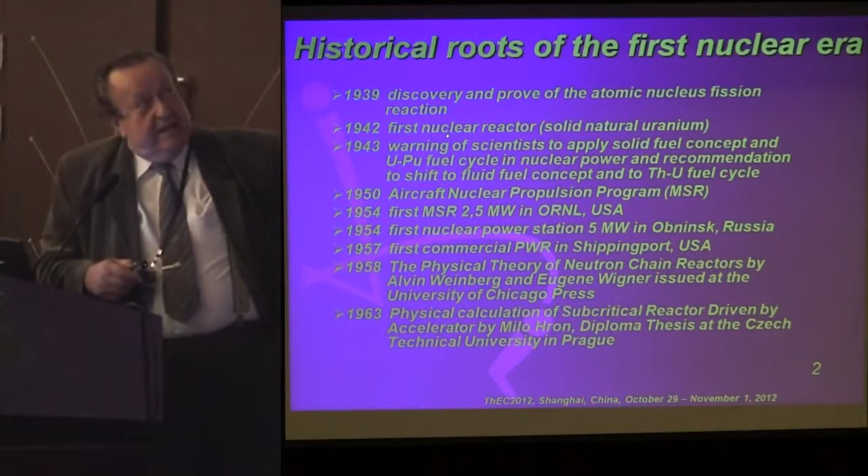The most important, I suppose, is the very beginning of this nuclear power application, which started - we are very close to the 70th anniversary of the startup of the first nuclear reactor, beginning of December 1942. And at that time we know very well there was only one possibility, the only fuel available, natural uranium.

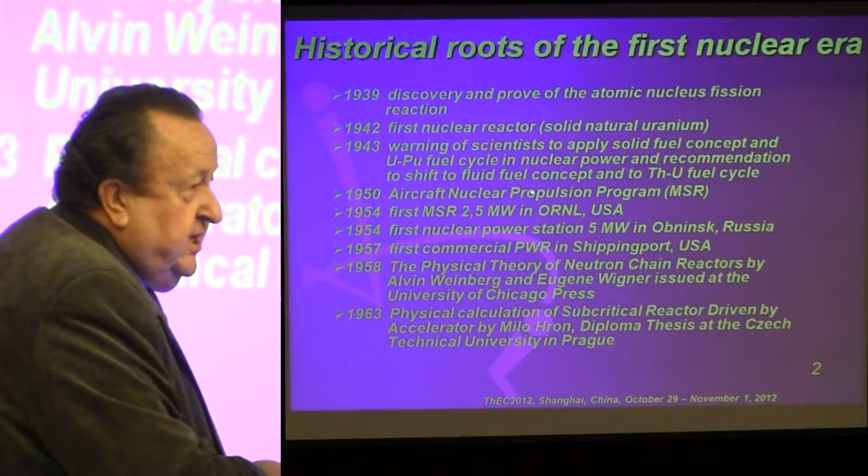To reach criticality, to put into operation and to keep the chain fission reaction, it was necessary to realize this first nuclear reactor system with the fuel in a solid phase, to have the highest density of nuclei, and to arrange it in the optimal heterogeneous reactor structure, with the optimal grid and highest quality moderator.

But the concept of solid fuel was, from the very beginning, the worst handicap of these nuclear reactor systems in the first era.

What's more, the top brains from the team of Professor Enrico Fermi, who organized this first step entering the first nuclear era, at a scientific conference in spring 1943 - of course at the time a secret conference - nevertheless immediately expressed a warning.

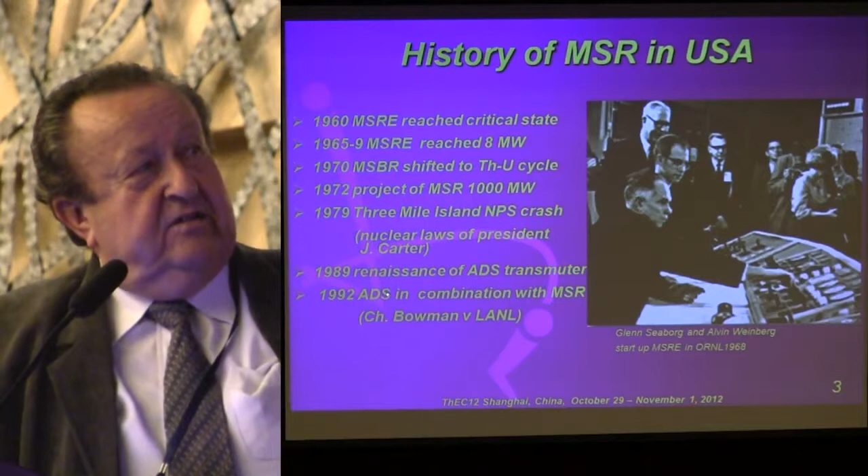It seems to me very important that the first accident in the United States, Three Mile Island, led to a stop in the further development of these new concepts and systems, and the renaissance of these efforts started at the beginning of the 90s.

So when it was stopped in the United States, fortunately other countries started to go on with this. Especially I should mention the activity of Professor Furukawa in Japan, who also initiated activity in this field in Russia, and I was personally participating in the collaboration where the Russian program was collaborating with some Czech institutions, solving especially...

...the problem of the fluoride volatility process and this technology. You see here the pilot line which was developed and manufactured in the Czech, at the time Czechoslovak, research and industrial basis, and installed in the first half of the 80s at the Russian Research Institute of Atomic Reactors in Dimitrovgrad, where it was available for checking this technology at a relatively high level of capacity.

The capacity of this line was reprocessing of 2 kilograms of heavy metal per hour. It was the heavy metal from the hot spent fuel from fast reactor. Immediately or a few days after discharging from the fast reactor, it was possible to reprocess.

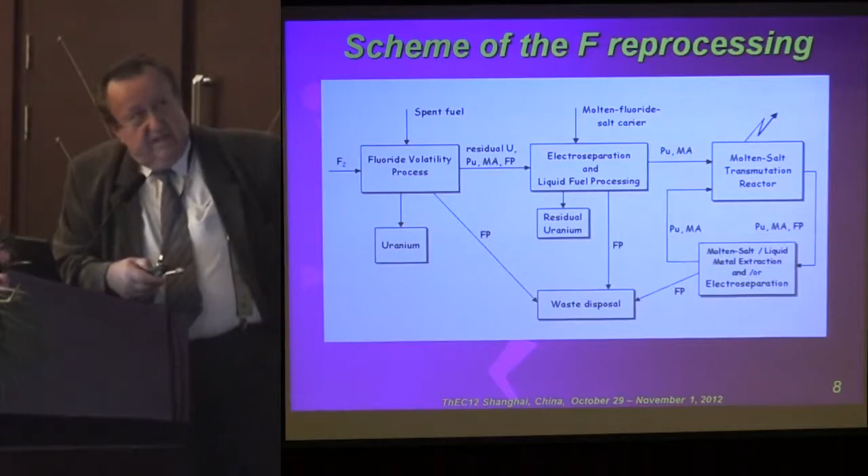You see on the scheme of this technology that this is very efficient. Separation by this technology is giving you 95% of spent fuel from a conventional reactor, for example from a pressurized water reactor. Totally, the whole amount of uranium and the short-lived fission products are going out of the cycle, and the rest - all the actinides and long-lived fission products, totally 5% of the whole amount of this spent fuel - you are obtaining in the form of fluorides, which may be molten, giving you your liquid fuel for this molten salt reactor system.

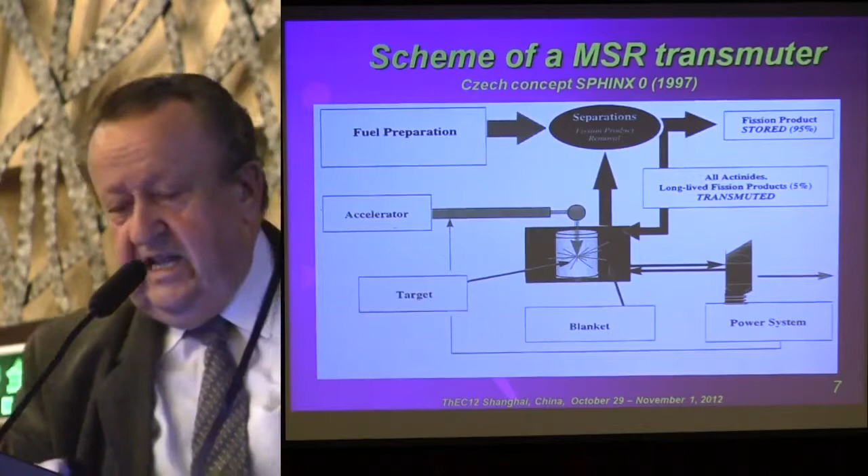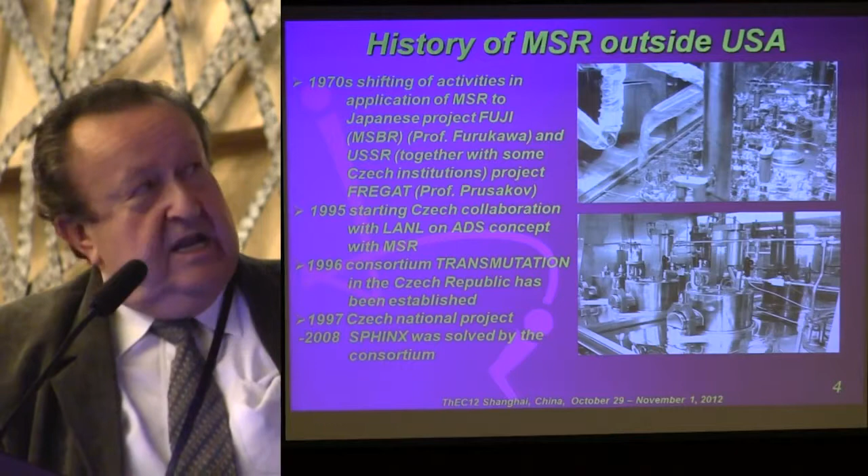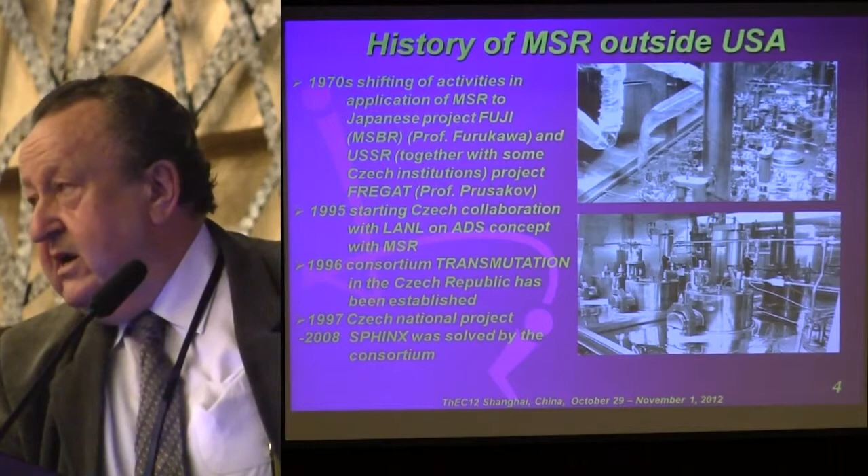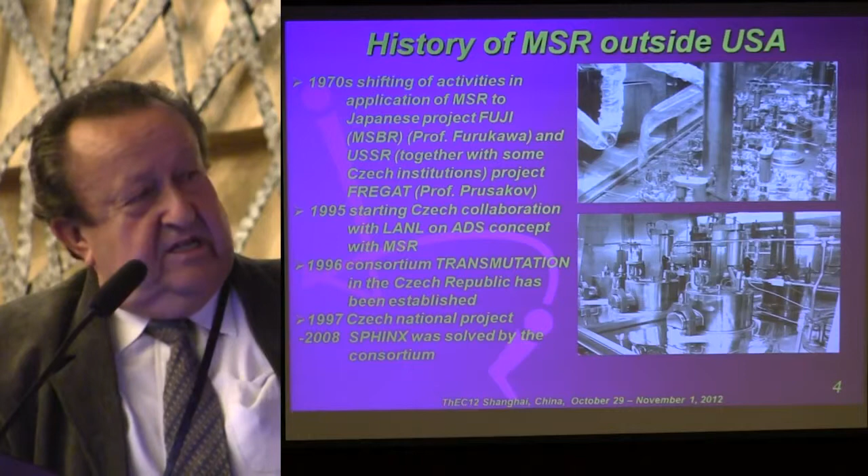Backwards to this renaissance in the beginning of the 90s. In '95 I was personally on a short study stay in Los Alamos National Laboratory, and afterwards started the collaboration between the Czech - at that time already Czech Republic was established - research and industrial institutions. They formed in 1996 a National Consortium, and started our national project Sphinx, which you see here.

The consortium was led by the Nuclear Research Institute, and the members were the industrial company Škoda Nuclear Machinery Branch, the Nuclear Physics Institute of the Czech Academy of Sciences, and the universities. From the very beginning it was the Czech Technical University in Prague, especially its Faculty of Nuclear Science and Engineering.

In the year 2000, Technical University in Brno joined this consortium, especially its daughter company EVM. And just recently, in 2010, the University of West Bohemia in Pilsen joined, which is preparing and educating specialists especially for Škoda Nuclear Machinery and the operation of nuclear power plants in our country.

The project we started, in fact after the establishment of this consortium in 1997, is called by the abbreviation Sphinx. You have here the meaning of this: Spent Hot fuel INcinerator by neutron flux, as I described, utilizing this fluoride volatility process for the front end of the fuel cycle. It is possible to use it for the nuclear incineration of spent fuel from conventional reactors.

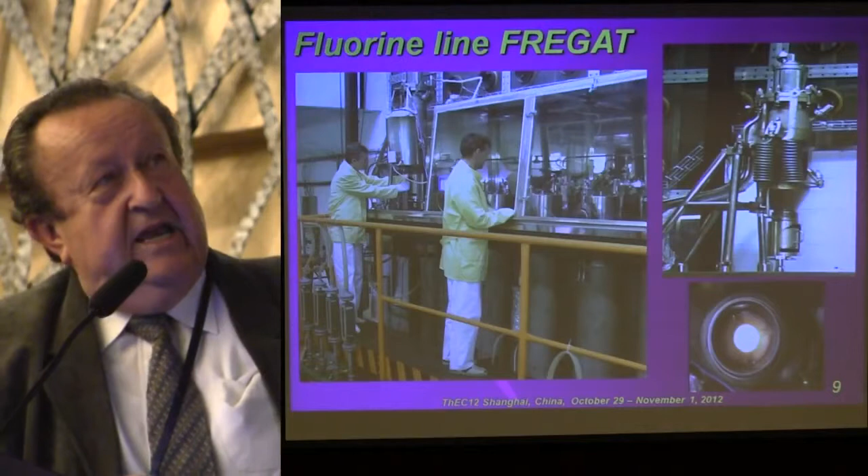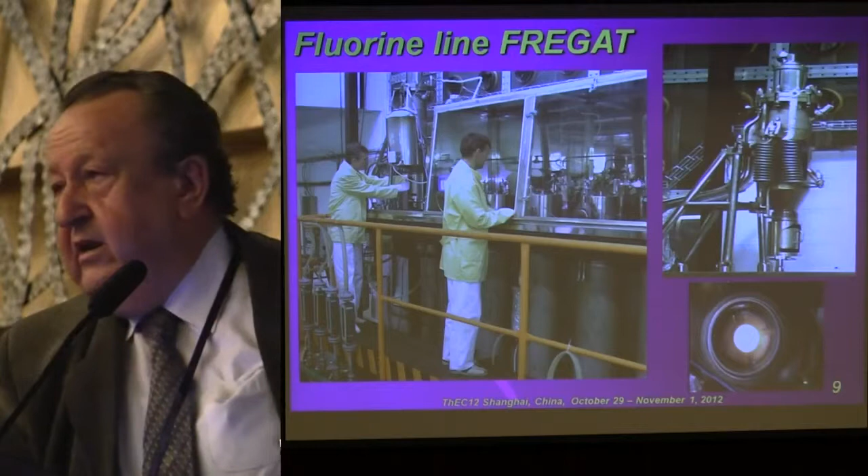You see here the scheme I've already shown, the detailed scheme of this fluoride reprocessing, and the pilot line, which was originally, as I mentioned, in Dimitrovgrad. But after the Chernobyl accident in 1986, the Russian activities in this field were stopped or temporarily interrupted. But in the year 1998-99, we moved this pilot line back to the Nuclear Research Institute in Czech and went on with the development and improving this technology in our own project.

And of course additional technologies in this pyrochemical process were added. Especially in the year 2004, we started to incorporate in this project, beside the function as an incinerator or burner, the function of breeder for application of this system in the thorium or changeover to the thorium-uranium fuel cycle.

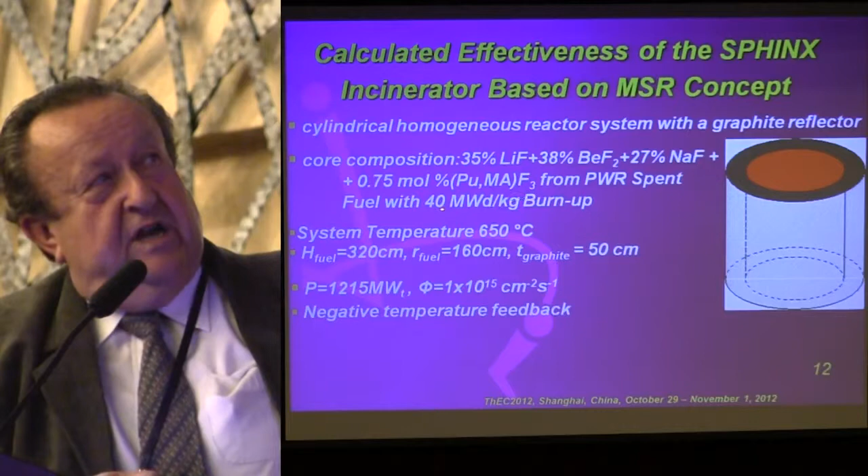Well, at the very beginning, of course, we made some starting mathematical calculations on some simplified mathematical models of the system. You see here the cylindrical homogeneous reactor with the given composition of salt, which is utilizing all the transuranium elements from the spent fuel from a pressurized water reactor with a burn-up level of 40 megawatt-days per kilogram.

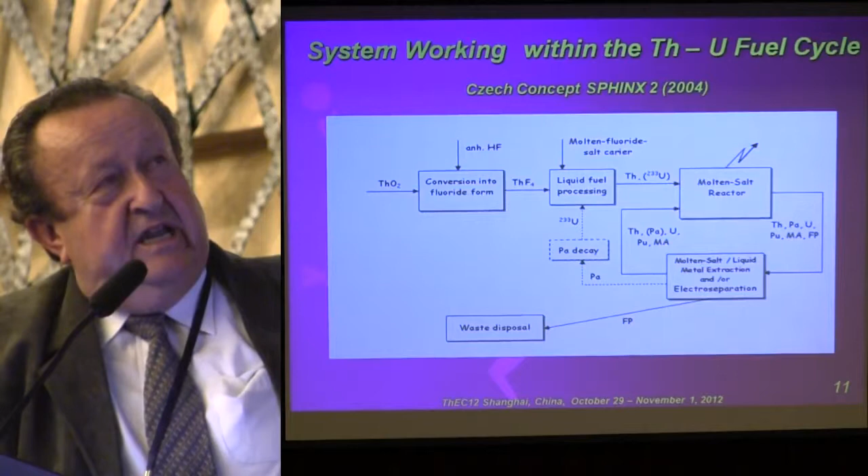The thorium fuel cycle scheme was added to this reprocessing, and afterwards, well, the results of these calculations are giving the comparison.

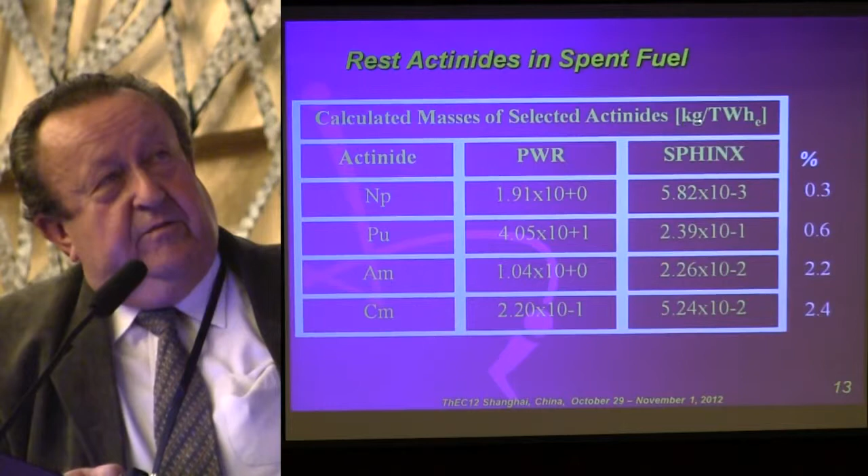If you have here the selected actinides and the amount in kilograms, or masses of these actinides in a pressurized water reactor per the produced energy, this is giving in comparison with the molten salt reactor cycle a decrease of roughly two orders of magnitude compared with the conventional reactor.

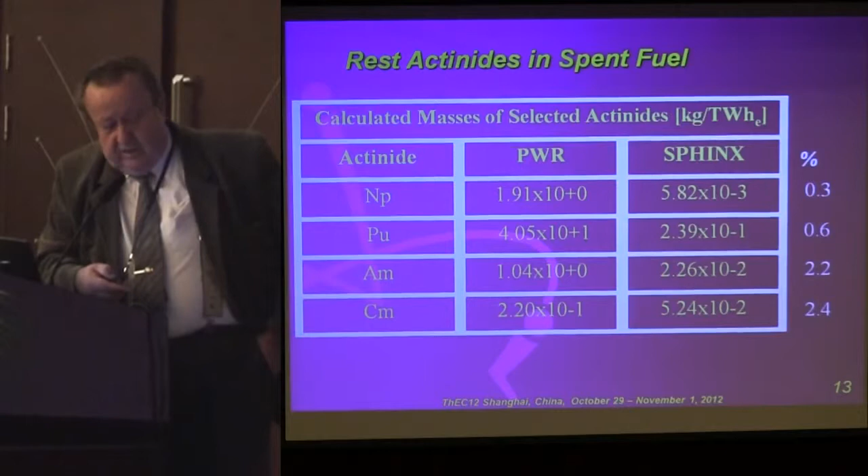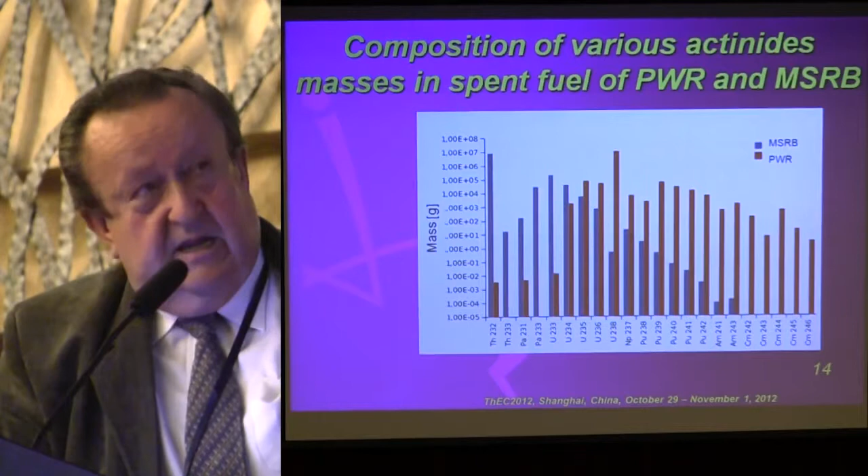So, now here you see the results of our calculations - not only the production of uranium-233 from thorium, but also the great difference: practically very low generation of transuranium elements in the thorium-uranium-233 fuel cycle. So this is a very important parameter, of course, for the safety and the additional features of this new system.

Okay, so we made at the very beginning some kind of optimization of the geometry of the system.

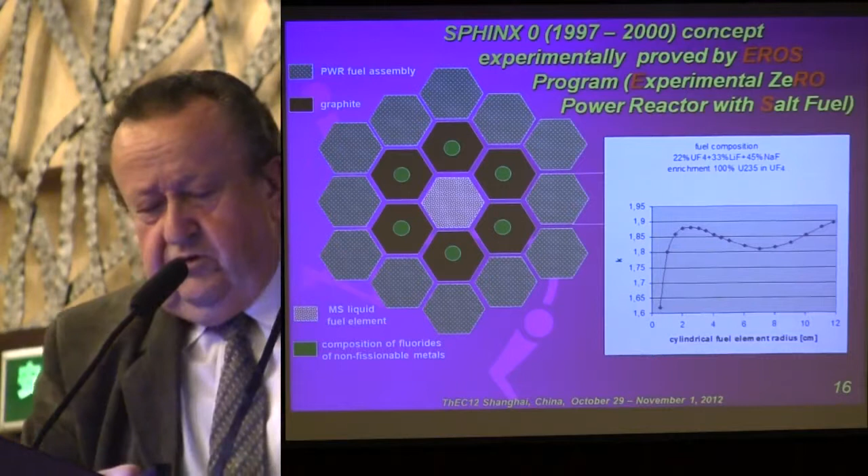From this point of view, we started to make the concept of the elementary module, which uses an element fully equipped with molten salt containing fissionable materials from the spent fuel of a conventional reactor. This serves as a burner and simultaneously as a source of neutrons for the blanket, which may be used for incineration of long-lived fission products, or for thorium breeding circuits. So this is a double, or even multi-purpose system, which we sometimes call the Jeep, for purposes very useful for nuclear power.

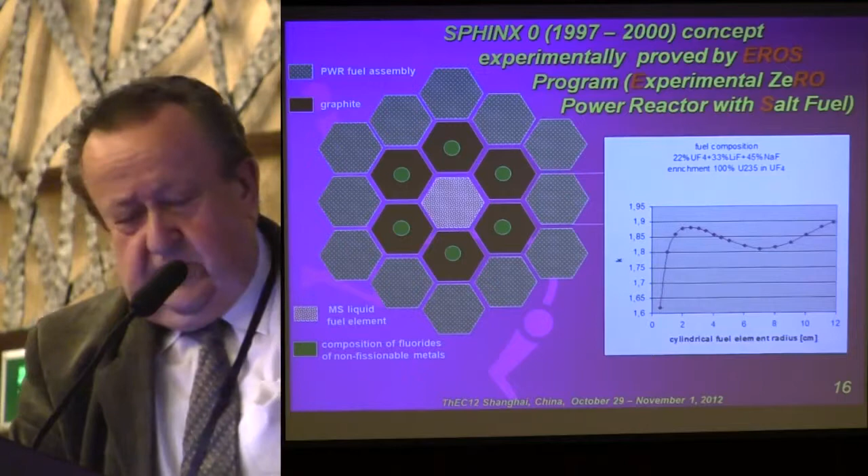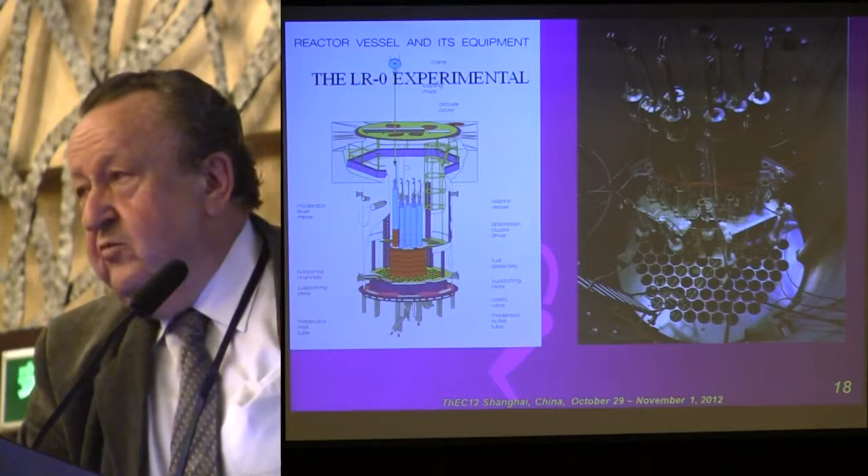Okay, so this concept was finally experimentally verified. I will show you the proposal of the experimental reactor given like this, but we did not erect a special experimental reactor. We used our experimental reactor, light water moderated, which was used for the development of pressurized water reactors at higher power limits, and we started to make the models of these elements and the core of the salt reactor.

This is under the condition that this is a full-scale model, but at room temperature. So the salt is not molten; it is in powder, with some better conditions to have a comparable density with the molten salt, but the neutronic characteristics and processes are practically identical with the real, full-scale power one.

So we made the measurements from the very beginning, the elementary module. You see here how the module is inserted in the light water moderated experimental reactor. And finally, there were measurements of this elementary module, as I mentioned, multi-purpose.

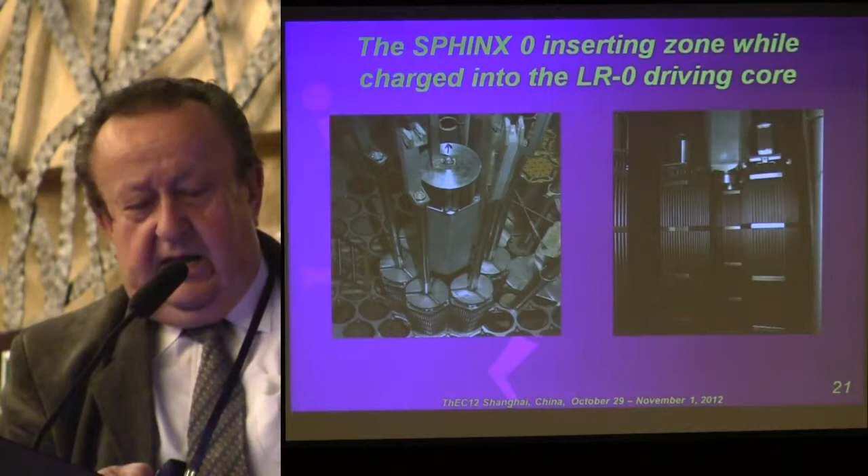All these possibilities are available here, and the measurements are showing here again a similar effect in these different configurations. You may notice that this is, of course, not made only for experimental verification, but as the basis for validation of computer code for this new system and so on.

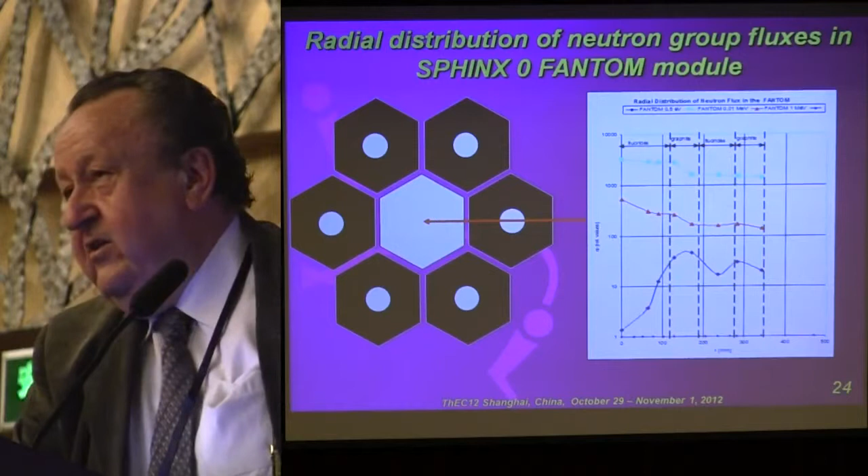But you can imagine that during this process, during the preparation of this experiment, you are collecting and accumulating knowledge, and especially not only in research, but even in industrial companies, some technological experience, which is very, very useful for the other steps in the development of the power and higher level of this system.

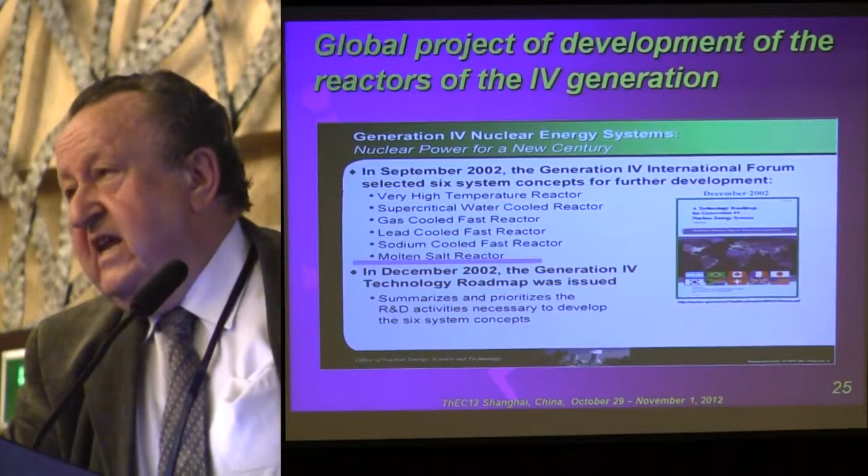Okay, so now a few words on international collaboration. One more feature which was shown in the first nuclear era is that the negative effects of the risk contained has a global influence. So it is necessary to solve this, and the development of this new technology requires a very reasonable level of international or multinational collaboration on a global scale.

So this was a proposal of this global project of Gen 4, 2002.

In the field of molten salt reactor, in 2004 it was decided that the molten salt reactor steering committee was established, originally with 3 members only: France, Euratom, and United States. In years 5, 6, and 12, Japan, Russia, and China joined this activity with their national programs. This is a very useful development of this basis.

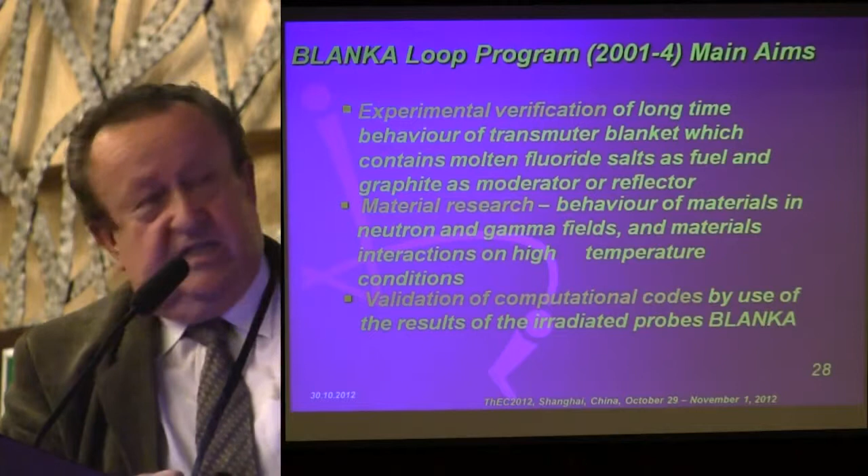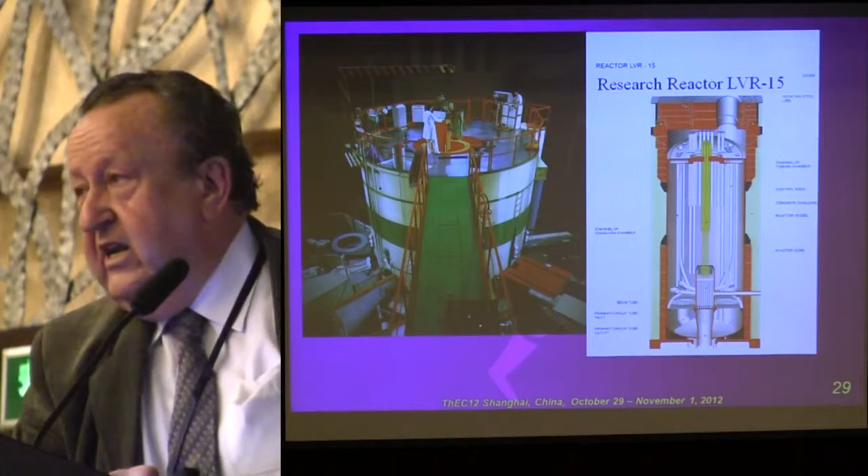So there were starting the so-called BLANKA loop programs. First were small size probes, but irradiated under conditions very close to operational, in the research reactor. You see there are 2 probes or rigs finally.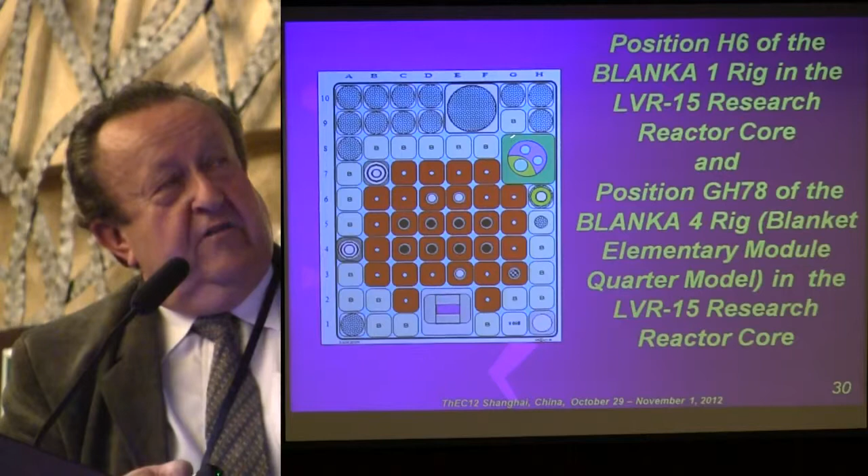One is the size identical with the fuel assembly of this research reactor, and the second was identical in size with 4 fuel elements, fuel assemblies. Here is the detailed structure of the probe inserted in the reactor.

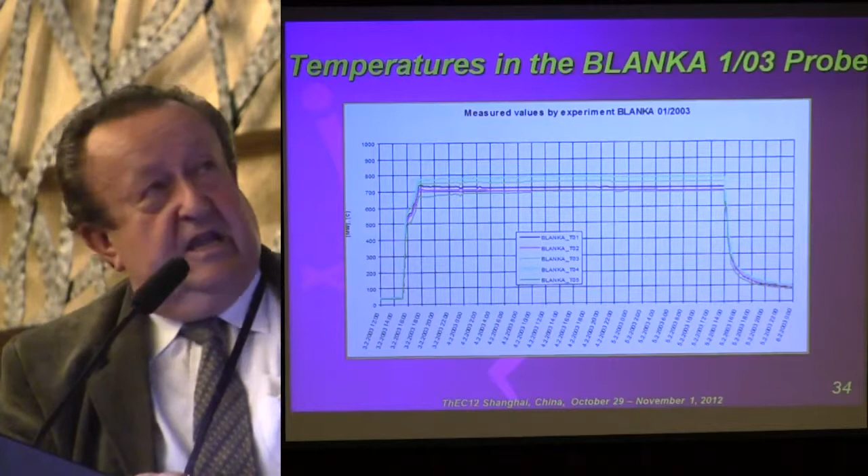Here are described the experiments already proved. The whole system was designed for a maximum temperature of 800 degrees centigrade, and measurement showed that the real temperature was between 700 and 800 degrees centigrade.

What is very important is that we may insert in the rig, let's say, 5 probes with different contents. Here you see, for example, sodium fluoride with a melting temperature of 995.

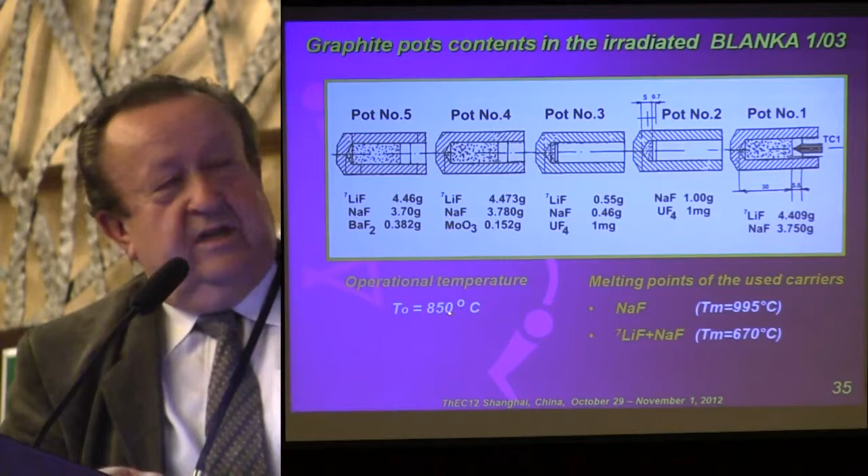So this is of course not molten at this lower temperature, but the realistic composition, sodium fluoride plus lithium-7 fluoride with a melting point of 670, is under these conditions molten, and you have natural circulation in the probe. So you may make the first test under conditions close to operational, but at very small size.

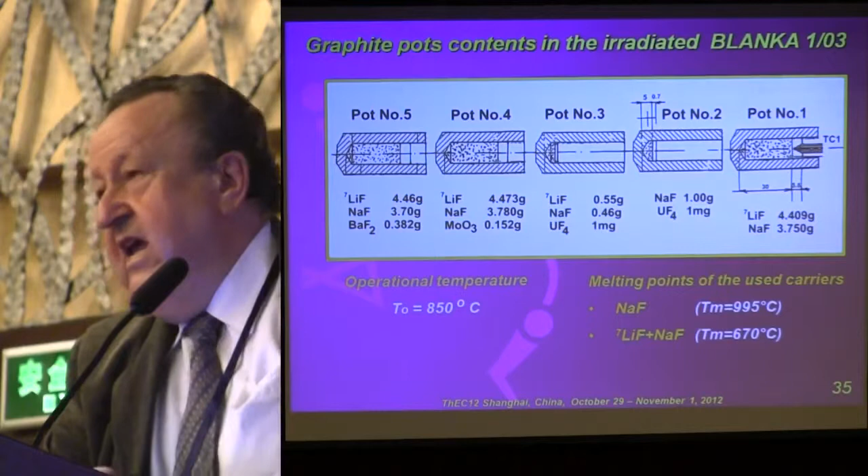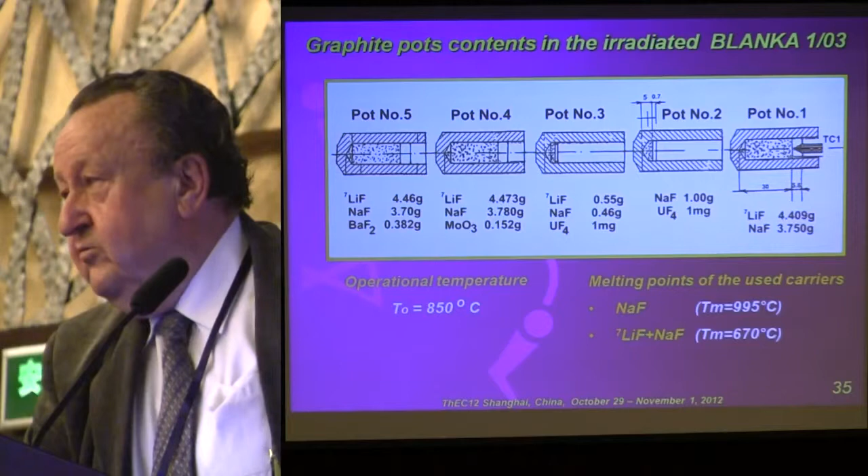One more feature in our conditions in the Czech Republic: if you have the fuel content containing the samples, after 48 hours of irradiation we already reach the limits allowed for our laboratories regarding the containing of transuranium elements. We made all this program in close collaboration with the Kurchatov Institute in Moscow.

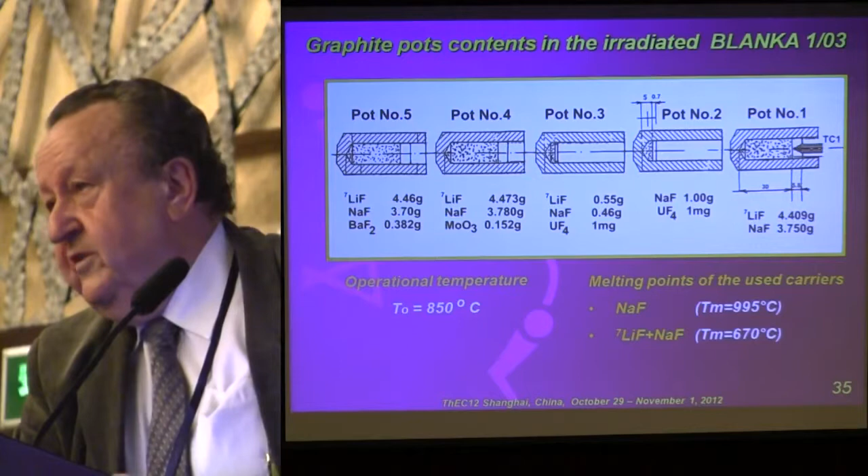So the same probes were afterwards irradiated in a similar research reactor at the Kurchatov Institute, and the irradiation was prolonged up to 6 months. This is, of course, very close to operational conditions.

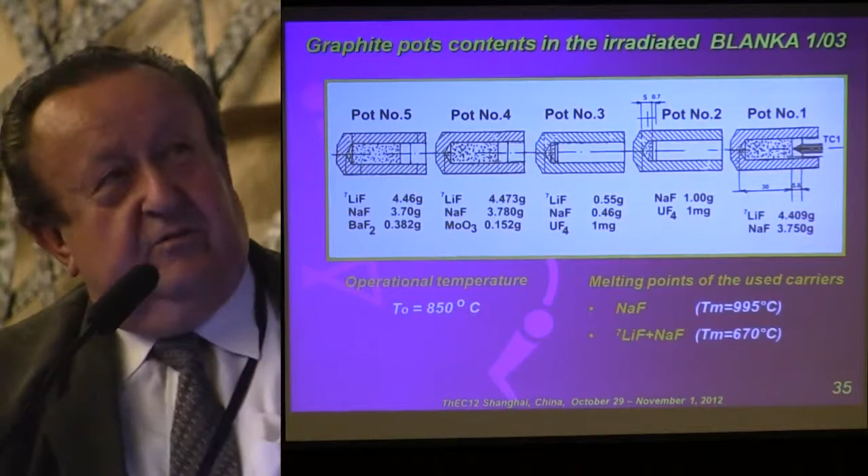You have afterwards analysis of what the probe contains after 6 months of irradiation in the high flux. This is very, very similar to the operation of the power reactor.

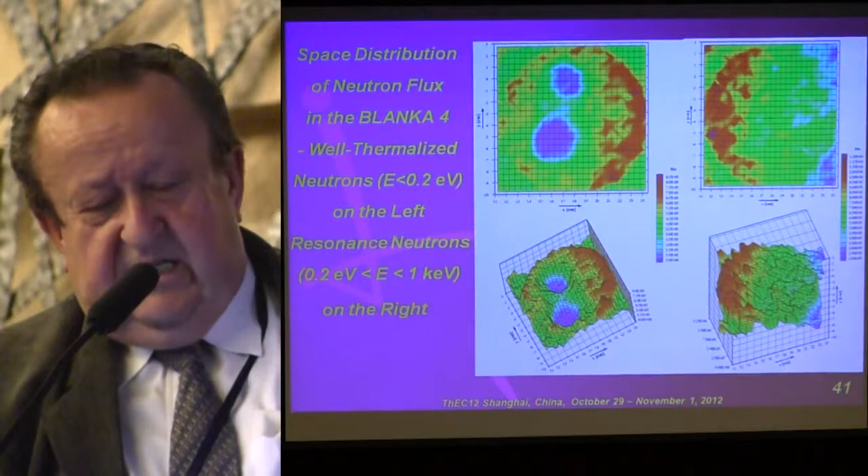The larger probe is 1/4 of this large model, because we use the symmetry. We tested this on the university reactor. You see here the results of the distribution of thermal neutrons and epithermal neutrons in such a complicated setup.

So this is, of course, the last stage: testing of thermohydraulic problems and simultaneously testing of materials, structural materials, under these conditions in a small laboratory loop, containing not only samples of material, but also simple components, pumps, and so on.

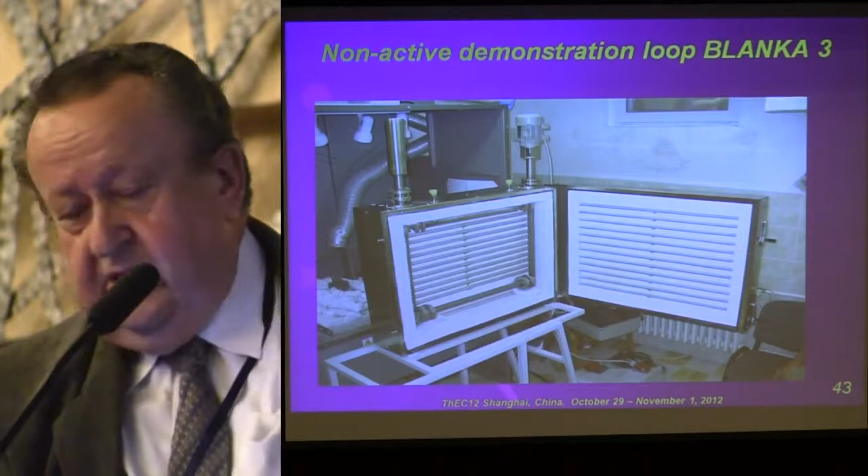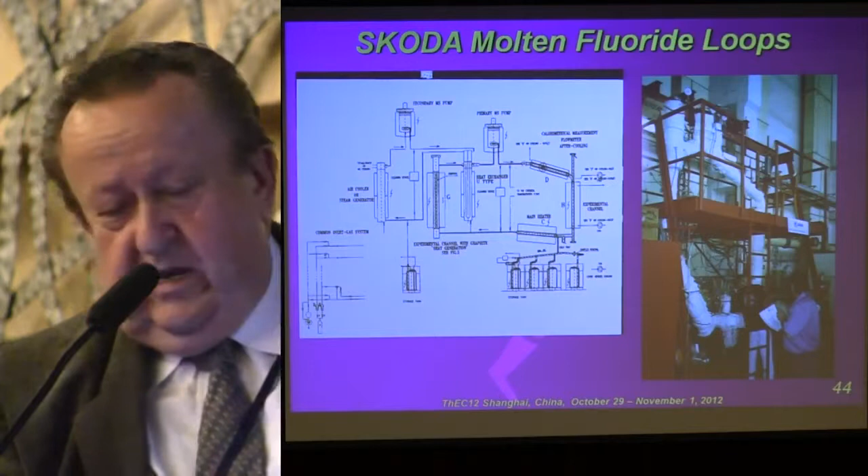And finally, the large size loop manufactured and operated at the Skoda company in Pilsen. Skoda also prepared a loop which was operated at the Technical University in Brno for testing full-scale components, relatively realistic.

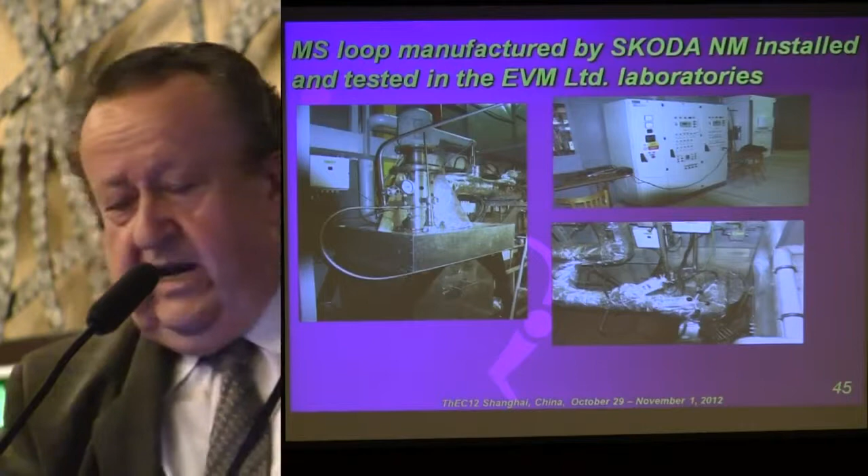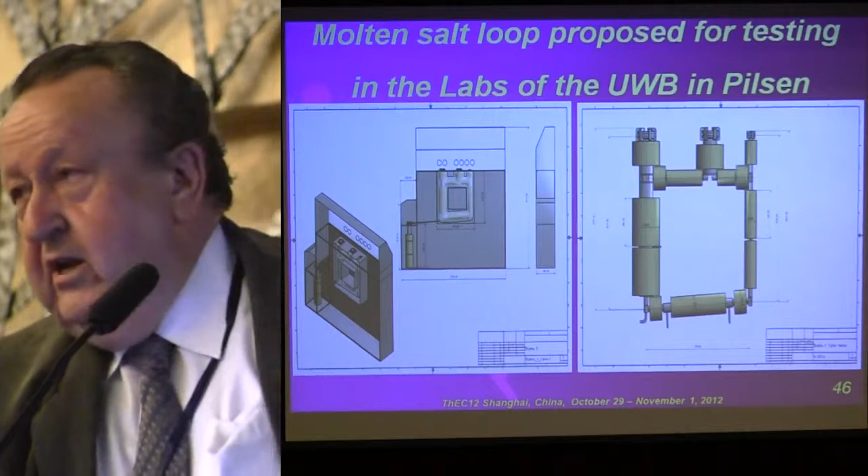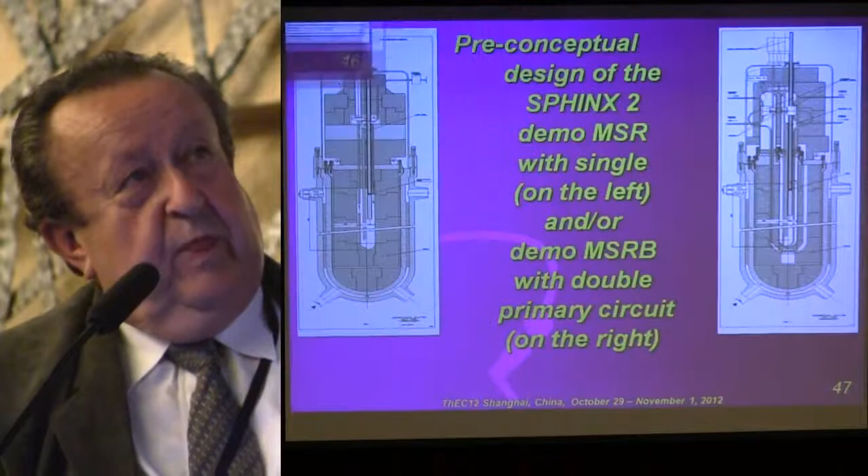And now the final version is the loop prepared for the University of West Bohemia, for not only research but also education of a new generation of specialists in nuclear engineering, especially for this industrial center.

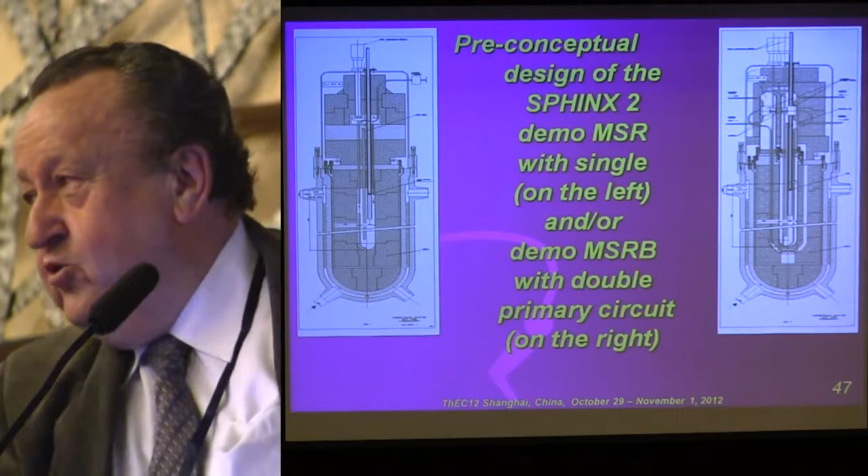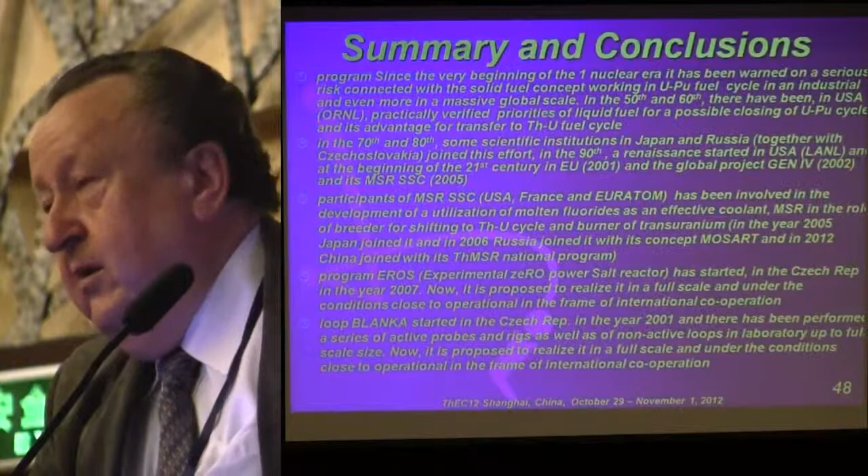This is the proposal: if we finish all this testing and development, we may try to erect such a demonstration reactor. Of course this will not be under the conditions of our own Czech Republic; we propose everything finished in multinational laboratory cooperation, as in the field of this global project. Thank you for your attention.